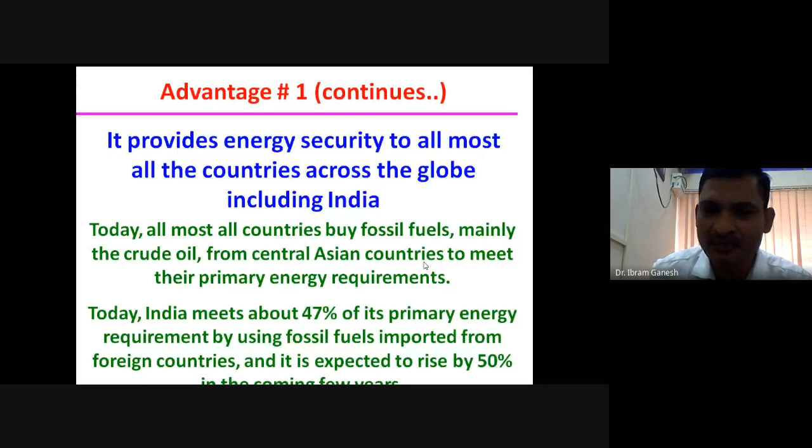So advantage number one continues. It can also change the global energy economy and energy dynamics of the world. That means once ARCI technology started deploying for public utility, no country is required to import fossil fuels, mainly the crude oil from Central Asian countries.

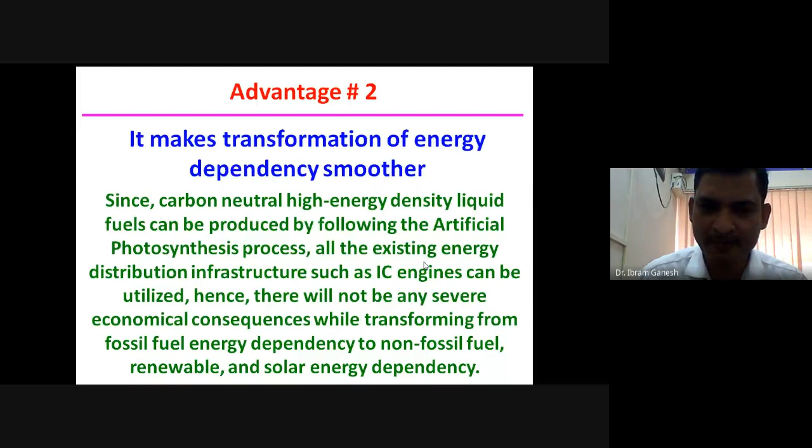The advantage number two is it makes transformation of energy dependency smoother. That means since carbon neutral high energy density liquid fuels can be produced by following the artificial photosynthesis process developed at ARCI, all the existing energy distribution infrastructure such as internal combustion engines can be utilized. Hence, there will not be any severe economical consequences while transforming from fossil fuel energy dependency to non-fossil fuel, renewable and solar energy dependency.

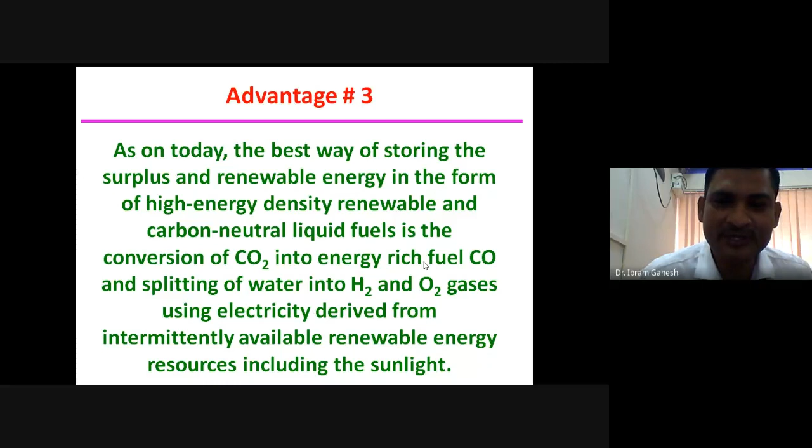As on today, the best way of storing the surplus renewable energy in the form of high energy density renewable and carbon neutral liquid fuels is the conversion of carbon dioxide into energy rich fuels such as CO and splitting of water into hydrogen and oxygen gases using electricity derived from intermittently available renewable energy sources, including the sunlight.

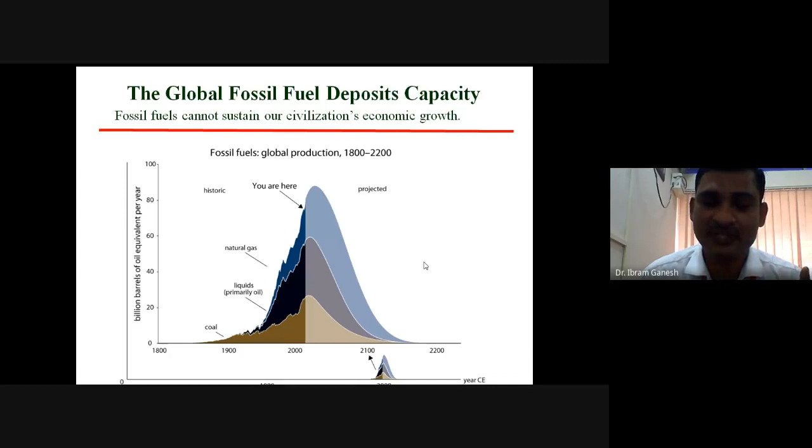This is Hubbert's curve. It shows the global fossil fuel deposits capacity. Hubbert says that fossil fuels cannot sustain our civilization's economic growth. As can be seen from this Hubbert's curve, in the next 100 to 150 years from now, all the extractable fossil fuels, mainly the crude oil and coal, will be exhausted. That means we have to find the alternative energy resource which can provide energy for the society.

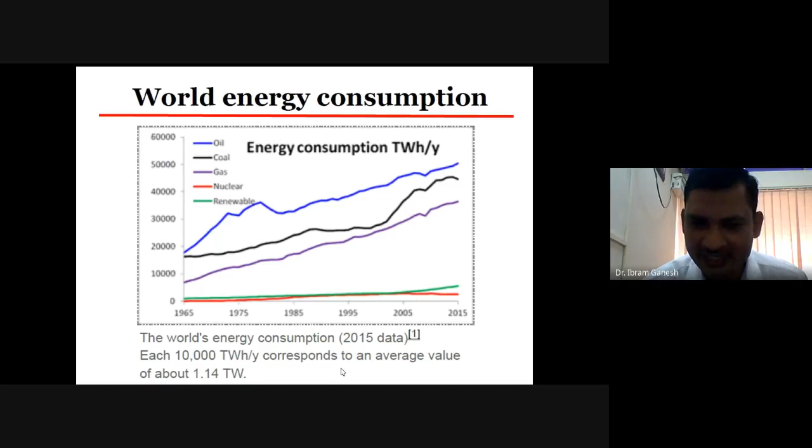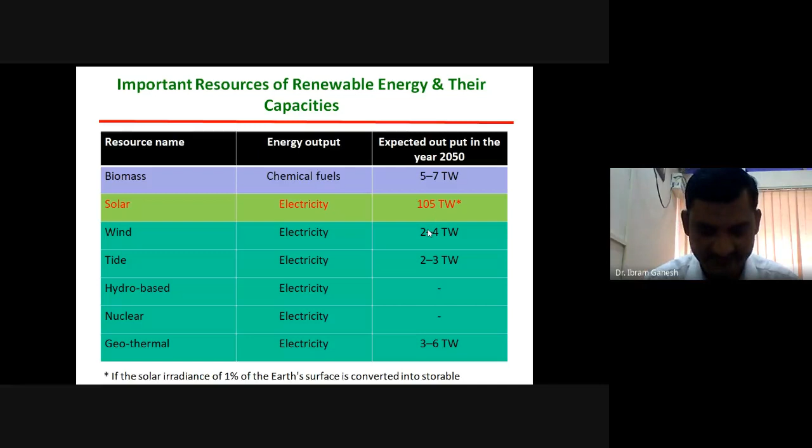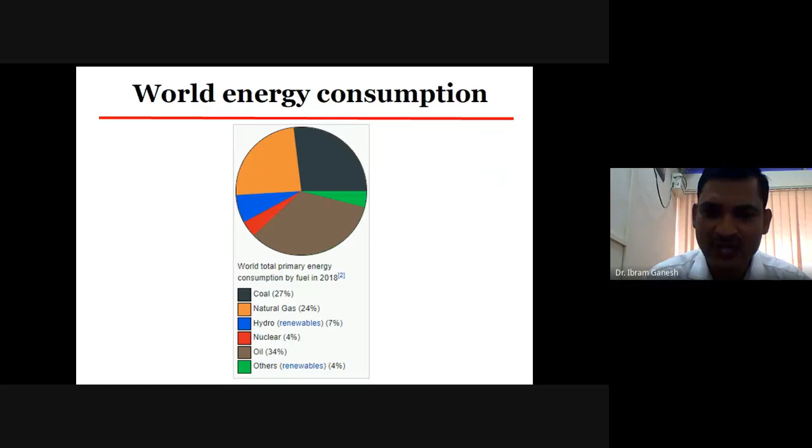Okay, this slide shows it in terms of percentage. Coal is 27% used today, natural gas is 24%, and oil is 34%. All together correspond to around 85%. Till today, the whole world meets about 85% of its primary energy requirement from only these fossil fuels, and renewable energies are very meager. In hydroelectricity we get around 7%, but it comes only when the dams flow the excess water. Otherwise, the other renewables, including solar and wind, are less than 4% only.

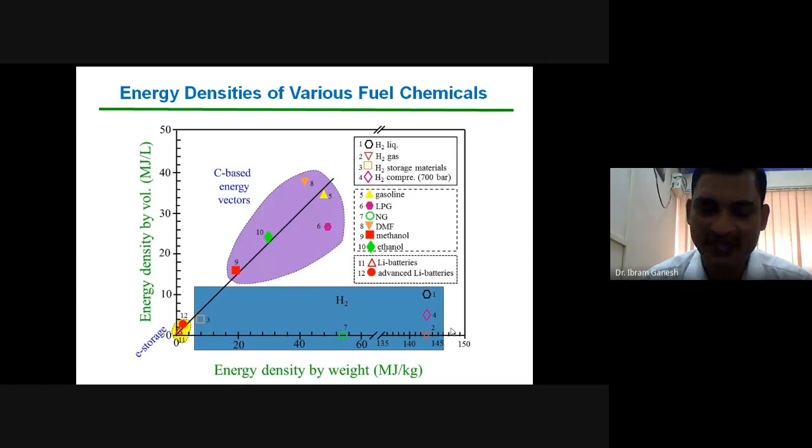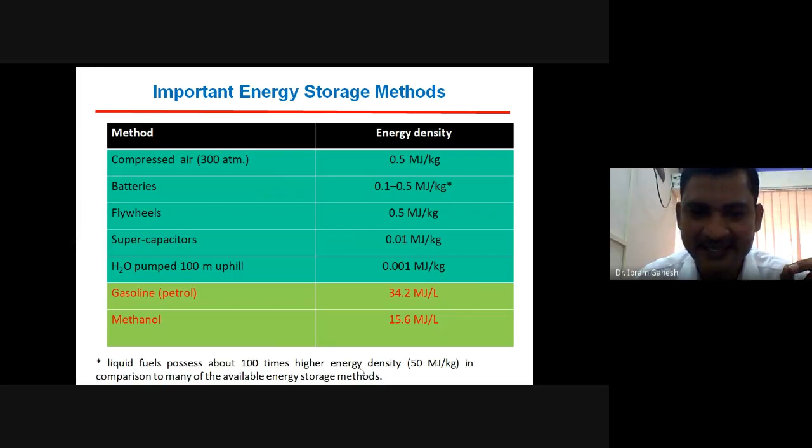For supercapacitors, it is 0.01 megajoules per kg. And for water pumped 100 meters uphill, it is 0.001 megajoules per kg. When compared with fossil fuels, like gasoline, it is 34.2 megajoules per 1 liter. And methanol, it is almost 15.6. That means liquid fuels possess about 100 times higher energy density compared to all the existing energy storage methods.

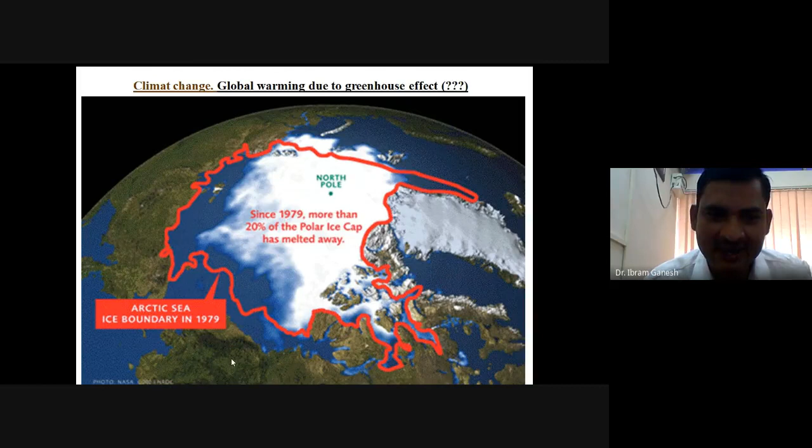So this figure shows the effect of global warming on the Earth. Since 1979, more than 20% of the polar ice cap has melted away. At the North Pole, it is the Arctic Sea ice boundary. This red line shows the Arctic Sea ice boundary in 1979.

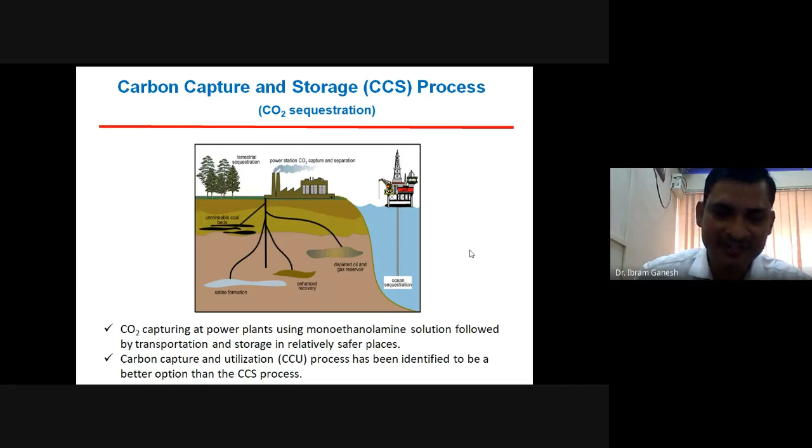Okay. The cost of the CO2 sequestration process. Recently, in 2016, one technology was developed at the University of Southampton, England. According to this technology, each ton of CO2 disposal costs around 1,000 rupees. It was printed in one of the local daily papers in Hyderabad.

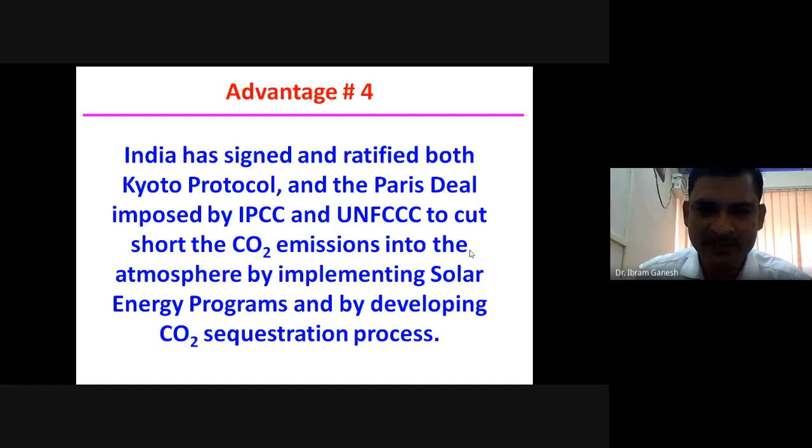Okay. Advantage 4. India has signed and ratified both the Kyoto Protocol and the Paris Deal imposed by the Intergovernmental Panel on Climate Change and United Nations Framework Convention on Climate Change to cut short the CO2 emissions into the atmosphere by implementing solar energy programs and by developing the CO2 sequestration process. Recently, the Department of Science and Technology also called for application proposals to develop the sequestration process to address the CO2 associated global warming problem.

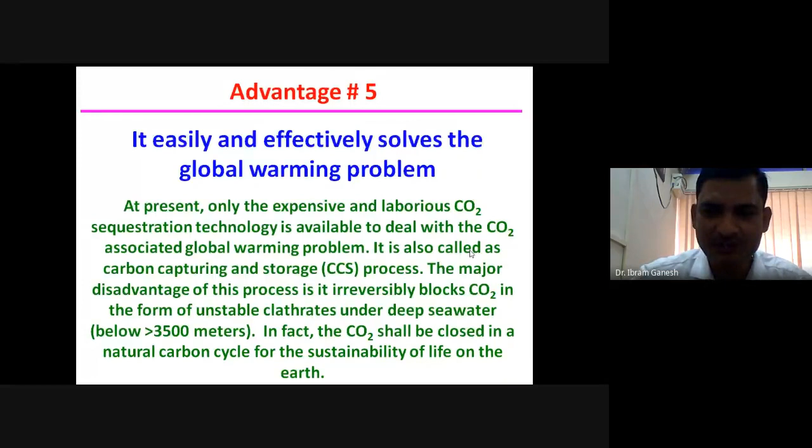Our ARCI technology, once it is implemented, easily and effectively solves the global warming problem. At present, only the expensive and laborious CO2 sequestration technology is available to deal with the CO2 associated global warming problem. It is also called the carbon capture and storage process. The major disadvantage of this CO2 sequestration process is it irreversibly blocks carbon dioxide in the form of unstable clathrates under deep seawater below 3,500 meters. In fact, the CO2 should be closed in a natural carbon cycle for the sustainability of life on Earth.

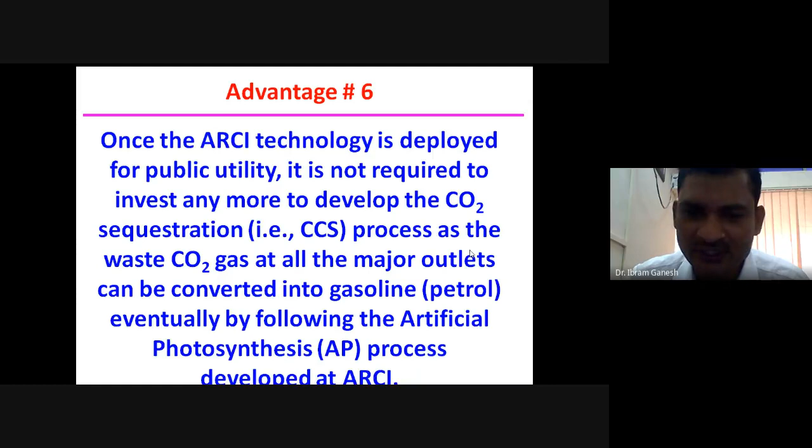As you know, each ton of carbon produces about 4 tons of carbon dioxide, and most of the carbon dioxide generated, not only in India but across the globe, is today released into the atmosphere. That is the reason it is causing global warming.

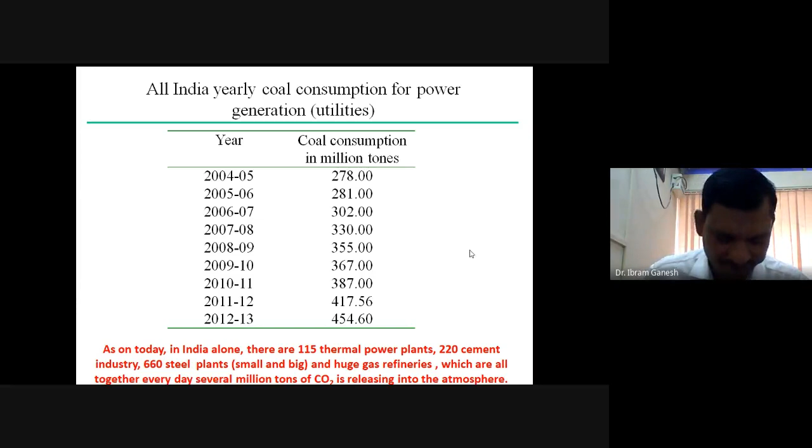Once the ARCI developed technology is fully deployed and operated for 5 to 10 years, it can create several millions of new jobs across the globe, and it can completely eliminate poverty from society across the globe.

After its successful deployment all over the world, at every home, like mobile phones are used by every individual today, in about a decade from then, almost all the excess CO2 present in the atmosphere can be removed and stored in the form of natural gas across the globe at all the seashores.

It requires less land area to get a unit amount of electricity from sunlight in comparison to all the existing commercially available sunlight to electricity producing technologies. It is simpler, more economical, easier and more efficient than any of the existing technologies today for converting sunlight into electricity. It involves only environmentally benign materials and processes. It is very close to the natural photosynthesis process.

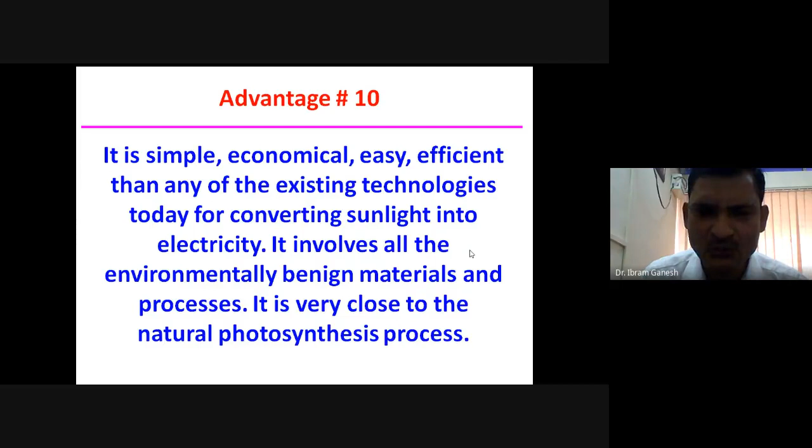Then what is the technology that solves all these energy and environment related problems without creating any other new additional problems? The only practicable artificial photosynthesis process. What is artificial photosynthesis? Similar to natural photosynthesis, artificial photosynthesis is nothing but the storage of solar energy in a form easily utilizable by human beings, using carbon dioxide and water as energy storing materials.

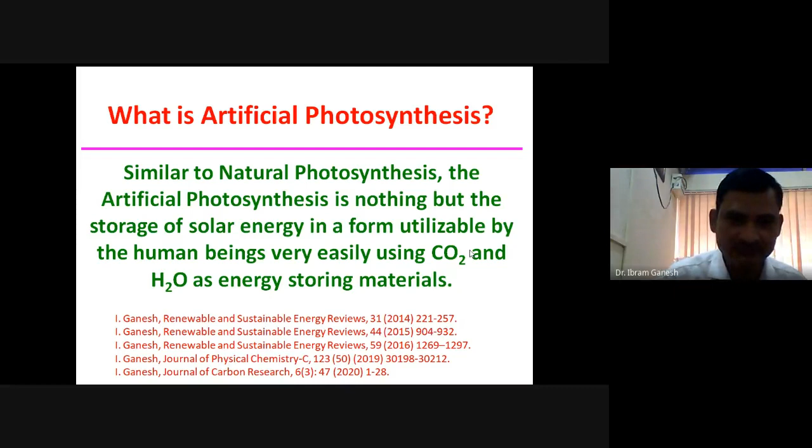What is the practicable artificial photosynthesis? As of today, there is no technology developed by human beings that works like a plant leaf, where the conversion of sunlight into electrical energy, the reduction of carbon dioxide to energy-rich fuels like carbohydrates, and the splitting of water into protons, electrons and molecular oxygen can be done.

So, we have to do the artificial photosynthesis process in 3 different separate steps, and then convert it into a usable fuel. The first process is production of electricity from sunlight. For this process, ARCI has invented a completely brand new technology called SLAPE, Semiconductor and Liquid Assisted Photothermal Effect, at ARCI Hyderabad.

As far as the second step, electrochemical reduction of carbon dioxide to carbon monoxide, is concerned, the process is developed at laboratory scale, and a new method was invented for this process too. As far as electrochemical splitting of water into hydrogen and oxygen gases is concerned, the entire world prior to 1970 was using this process to get commercial hydrogen gas from water. Around 1970, the steam reforming of methane process was invented, and today about 96% of commercial hydrogen gas comes from steam reforming of methane.

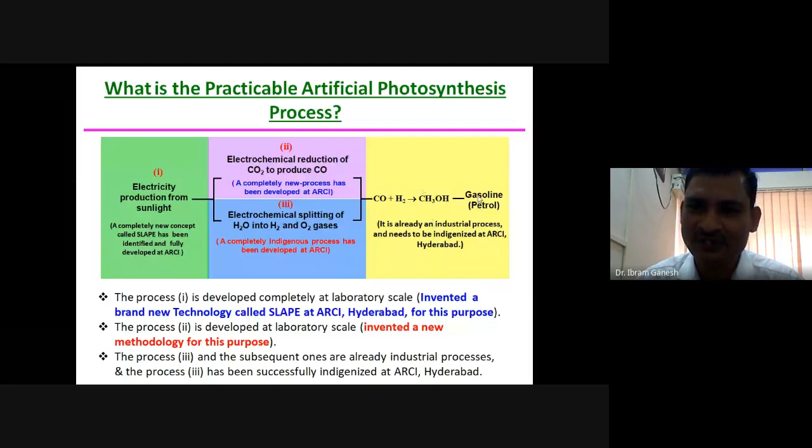Recently, a process for capturing CO2 from automobile vehicles was also developed: carbon dioxide capture from internal combustion engine exhaust using the temperature swing adsorption method. The captured CO2 can store renewable energy by being converted into green fuels using co-electrolysis. About 90% of the carbon present in the fuel can be recycled using the CO2 capture system, and the remaining 10% can be supplied from biomass.

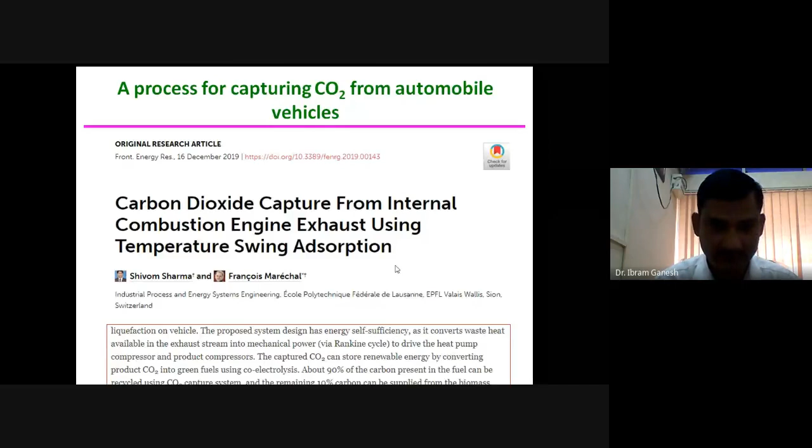As can be seen from the slides, nature also uses 2 separate electrochemical routes to convert carbon dioxide, water, and sunlight into carbohydrates. They are called photosystem 1 and photosystem 2. In photosystem 2, water is split into molecular oxygen, protons and electrons. These protons and electrons are utilized in the CO2 conversion into food material, carbohydrates, in photosystem 1. In fact, the energy consuming, thermodynamically unfeasible process is water splitting, not the CO2 reduction to carbohydrates.

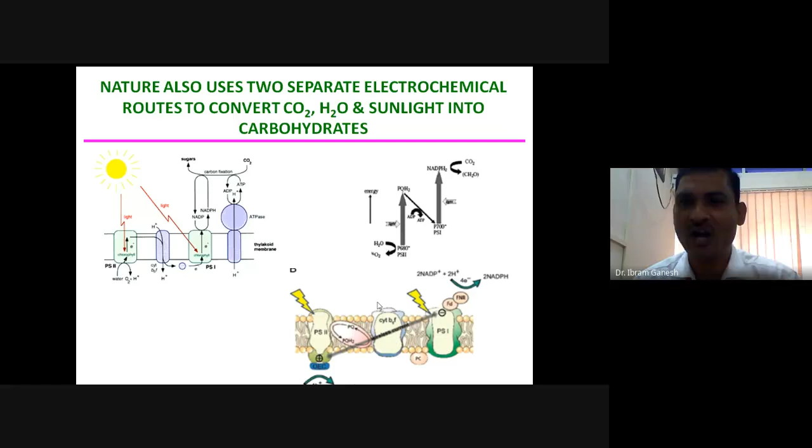CO2 reduction to any useful product is meaningful only when the energy required to drive this thermodynamically energy consuming process comes from renewable energy resources only, like electricity derived from sunlight. So the first step of the practicable artificial photosynthesis is electricity production from sunlight.

Today, there are 4 methods available to convert sunlight into electricity. The first one is silicon photovoltaic solar cell panels. The second one is dye-sensitized solar cells, also called Grätzel cells. The third one is concentrated solar power energy. The fourth one is thermoelectric generation, that is Seebeck and Peltier models.

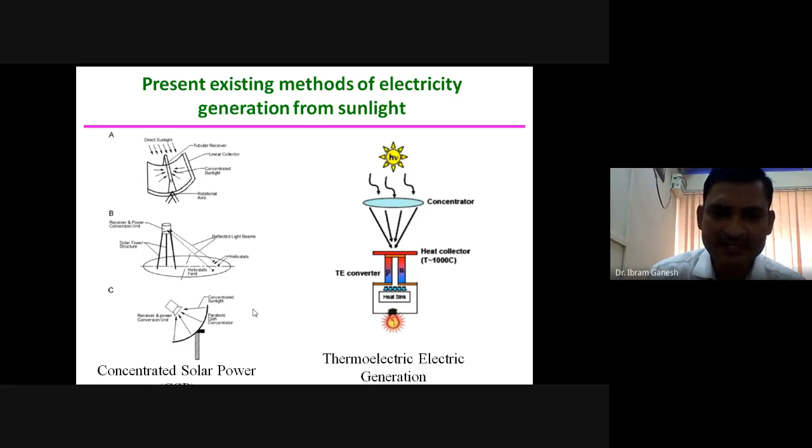So, how much electricity is produced today worldwide using solar photovoltaic cells, that is solar panels? In 2017, among the electricity used by the whole world, only 1.73% was produced from solar panels. That means 98% of electricity still comes from thermal power plants, or occasionally from hydropower. Hydropower we get only when dams overflow the water; otherwise, society has to depend only on thermal power plants, which use fossil fuels to generate electricity.

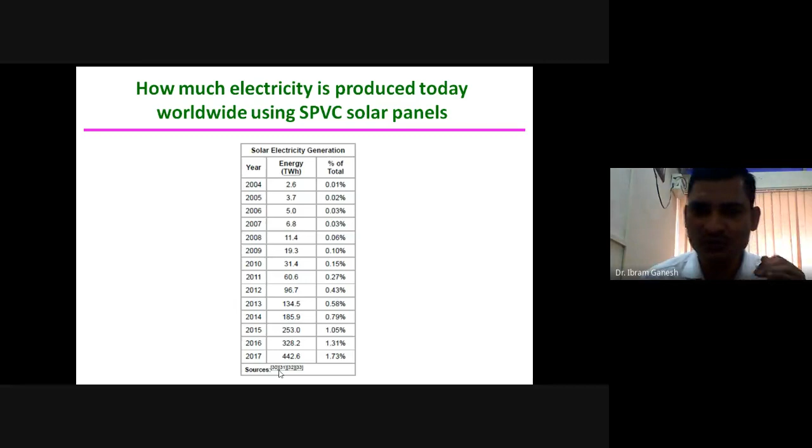So, among the top 10 solar power plants which generate the maximum electricity, 5 are present in India only: the Pavagada solar power plant, Badla solar plant, and Kurnool ultra mega power plant. These are India's, and not only in India, in the entire world they are the maximum electricity producing power plants from solar energy.

Silicon solar power cell panels were introduced almost 30 years into the market. In the recent past, its manufacturing cost has come down to the lowest possible extent, behind which it cannot be reduced further. But despite that, only less than 2% of electricity is produced from sunlight. Why is that?

The reason is because of these limitations, solar panels are used only less in society. I will tell you the limitations. The maximum achievable solar electricity conversion efficiency is only less than 20%. Hence, they need relatively larger land areas to get the desired voltage power capacities.

The light absorption is limited to only 70% of the sunlight reaching the Earth's surface, as its band gap energy is 1.1 electron volts with a corresponding wavelength of about 1125 nanometers. That means silicon in solar photovoltaic cell panels does not absorb sunlight in the range of 1125 nanometers to 2400 nanometers, which accounts for about 30% of the sunlight reaching the Earth's surface.

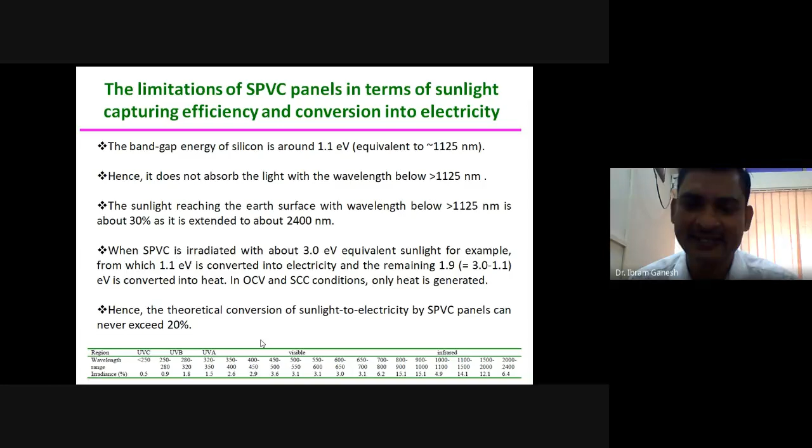When SPVC is irradiated with, for example, 3 electron volt sunlight, only 1.1 electron volts equivalent of light is converted into electricity, and the remaining 1.9 electron volts is converted into heat. Also, under open circuit voltage and short circuit current conditions, only heat is generated and no electricity is generated. Hence, the theoretical conversion of sunlight to electricity by silicon photovoltaic cell panels can never exceed 20%.

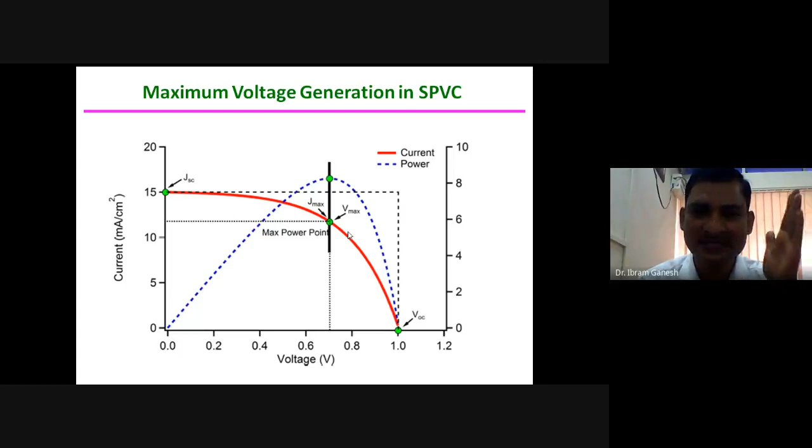This diagram shows the maximum voltage generation in solar photovoltaic cells. Here only up to 0.7 volts can be generated because its band gap is 1.1 electron volts. A material with 1.1 electron volts band gap can generate maximum 0.7 volts electricity.

Solar panels also cause the photovoltaic heat island effect. Larger solar power plants increase local temperatures. Solar panels are fabricated so that the in-situ generated heat energy by the silicon solar cells is dissipated as early as possible to achieve maximum sunlight to electricity conversion efficiency. For this, they select thin 3.2 mm solar glass and very thin, about 10 times 10 to the power minus 4 thick, ethylene vinyl acetate polymers, compacted into the solar panel. This EVA and the 3.2 mm thick glass ensure that the maximum amount of heat generated dissipates into the atmosphere as early as possible.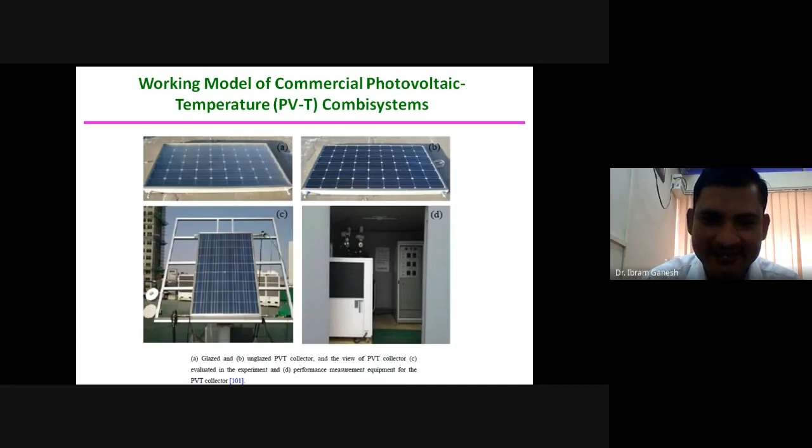This photograph indicates some commercially deployed systems. In this, A contains glazed and B contains unglazed PVT collectors.

In these silicon photovoltaic solar cells, the silicon cells have to be vacuum compacted between two layers of EVA encapsulant. If any moisture or air is present surrounding the solar panels during exposure to sunlight, the silicon undergoes conversion into silicon dioxide and loses its sunlight to electricity generating capability. That is why we must ensure that during exposure to sunlight, the silicon solar cell panels do not come into contact with either moisture or carbon or oxygen, because they should not undergo oxidation.

When electrons are excited from the valence band to the conduction band, the generated holes in the valence band and the electrons present in the conduction band have the ability to pull electrons from water. That is why they can easily oxidize the water, and they themselves undergo oxidation into a highly inert silicon dioxide material from silicon.

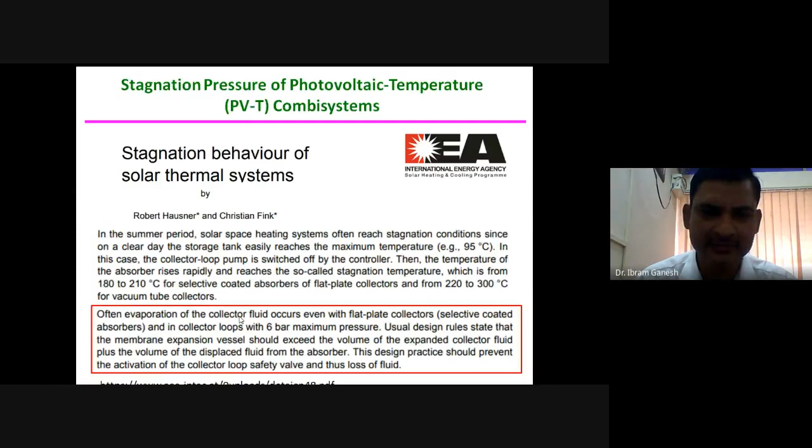Apart from the temperature, during stagnant conditions, the pressure also rises very often. Evaporation of the collector fluid occurs even with flat plate collectors, selective coated absorbers, and in collector loops with 6 bar maximum pressure. During stagnant conditions, this photovoltaic temperature condition generates pressure up to 6 bar. Because of this 6 bar pressure, sometimes it leaks the system and causes accidents.

Mrs. Toshiba Environmental Solution Japan says that recycling of silicon photovoltaic cell panels does not provide any profit, as the expenditure incurred for recycling is more expensive than the cost of the resultant products obtained from the recycled solar panels. This slide shows the first failure of silicon solar panels deployed for large scale utilization for domestic purposes.

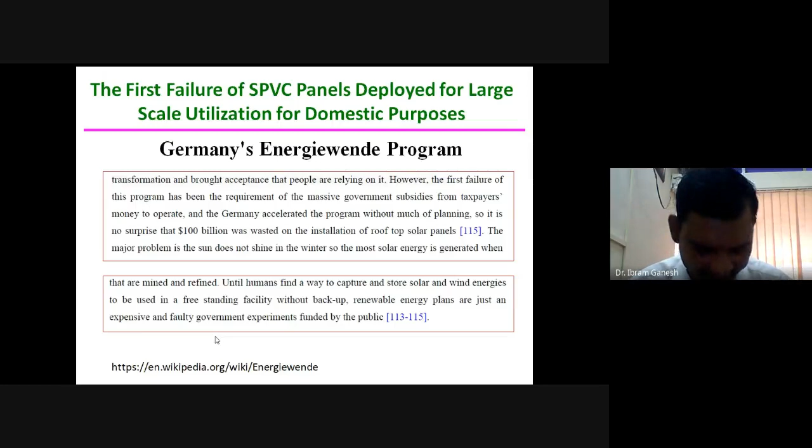In order to solve all the problems associated with silicon solar panels, a new method of electricity production from sunlight called Semiconductor and Liquid Assisted Photothermal Effect was invented at ARCI Hyderabad. Recently, we have filed this process for patent in India: a device and method for converting sunlight into heat energy using semiconductor materials immersed in a stable organic solvent for electricity generation.

So this SLAPE technology utilizes semiconducting materials for generating heat energy from sunlight. The main criteria to be possessed by the semiconductor materials is that they should have not only the band gap energy, but the band edges are also very important. They should have low band gap energy and band edges amenable to the liquid used to trap the sunlight.

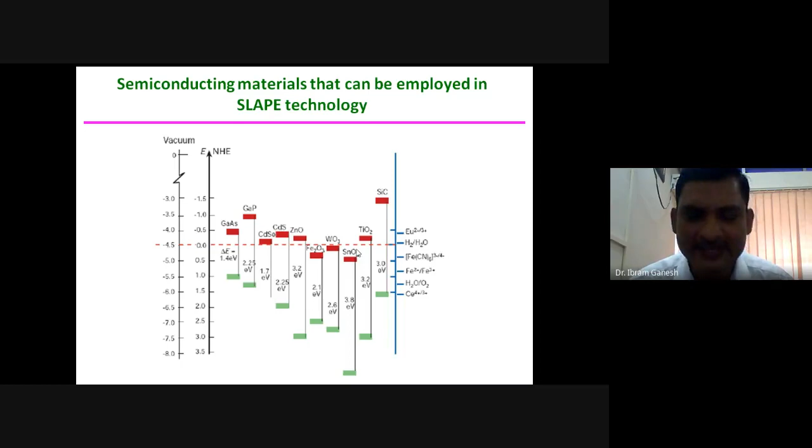Among the solvents listed in the bracketed red-line box, none have a reduction potential lesser than minus 2.5 in comparison to the standard hydrogen electrode, and their minimum oxidation potential is 3.2. Compared with the semiconductor materials, except for tin oxide, none have an oxidation-reduction potential more than 3.5 volts when compared to normal hydrogen electrodes. That means, except for tin oxide, all other semiconductor materials listed here can be utilized to generate electricity from sunlight in combination with these stable organic solvents.

So when the semiconducting materials are fully immersed in these organic solvents and exposed to sunlight, none of those semiconducting materials can either oxidize or reduce the solvents, because the solvents' band edges are very far apart in comparison to the oxidation-reduction potentials of those semiconducting materials.

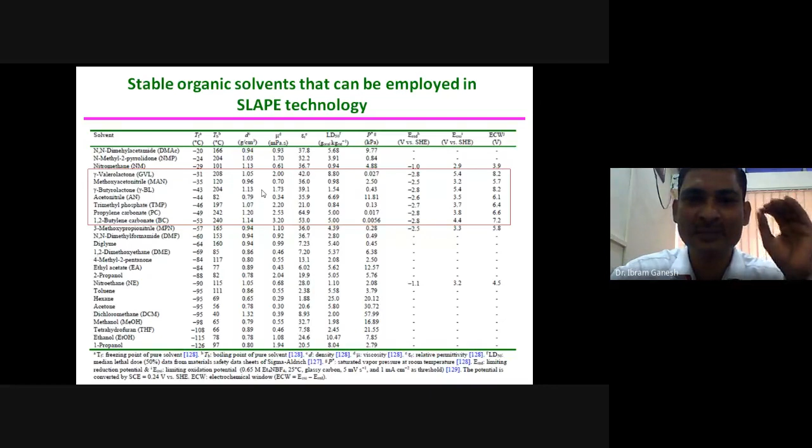So what is the mechanism used in the Semiconductor and Liquid Assisted Photothermal technology developed at ARCI? The first step is we use a semiconducting material completely immersed in a stable organic solvent. When that system is exposed to sunlight, it absorbs the sunlight and converts it into heat energy. This sunlight-to-heat energy generating device's duty is to capture the sunlight and translate the absorbed light completely into heat energy.

Once the heat energy is generated, we utilize it to rotate a system like a reciprocally moved steam engine, which converts the heat energy into rotational mechanical energy. Once the rotational mechanical energy is generated from the heat source instead of directly from sunlight, an electric generator attached to this reciprocally moved steam engine converts rotational energy into electrical energy. This electric generator dynamo uses electromagnetic induction principles, that is, Faraday's and Lenz's laws of electromagnetic induction.

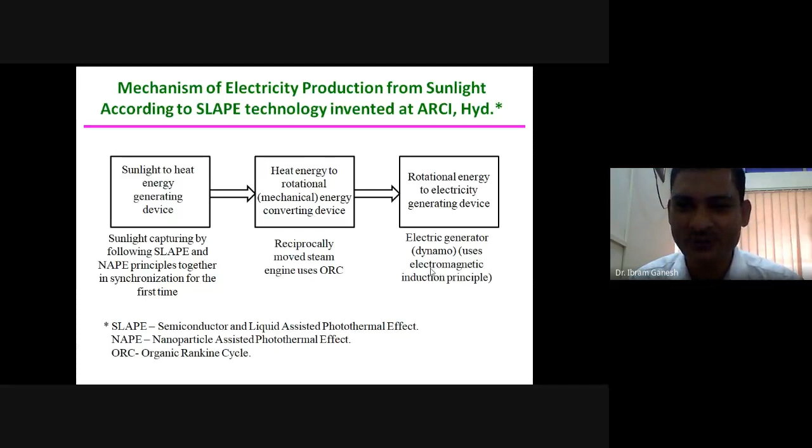So in comparison to silicon solar panels, the major advantages of our technology are it exhibits all the benefits that are exhibited by silicon photovoltaic cells. In comparison to silicon photovoltaic solar cells, it is economical and stable, as it need not employ expensive materials like crystalline silicon solar cells. Unlike silicon photovoltaic cells, it does not consider only 70% of sunlight, for it absorbs 100% of light reaching the Earth's surface and converts it into heat energy.

Unlike silicon photovoltaic cells, its voltage generation is not limited to only 0.7 volts. Unlike silicon photovoltaic cells, its conversion does not decrease with increasing ambient temperature, and it does not block 8 to 10% of light conversion to electricity by the grid lines printed on the silicon solar cells. And unlike PV, it need not be irradiated with straight light.

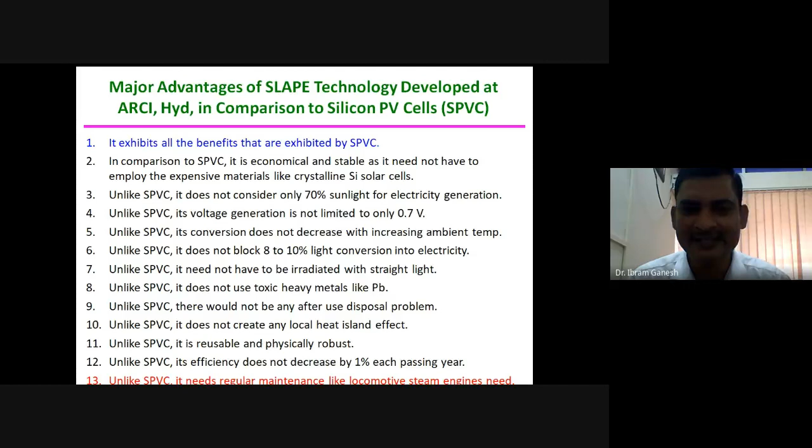It does not use toxic heavy metals like lead. There would not be any after-use disposal problem, it does not create any local heat island effect, it is reusable and physically robust, and its efficiency does not decrease by 1% each passing year. However, unlike SPV, the silicon photovoltaic cells, it needs regular maintenance like locomotive steam engines need.

solution-based systems. That is the reason we have used semiconductors to absorb up to 70% of the light falling on the surface. The remaining 30%, that is IR radiation, will be absorbed by the liquid used in our system. So both liquid and solid together absorb the complete light falling on them, and they convert that incident light into heat energy.

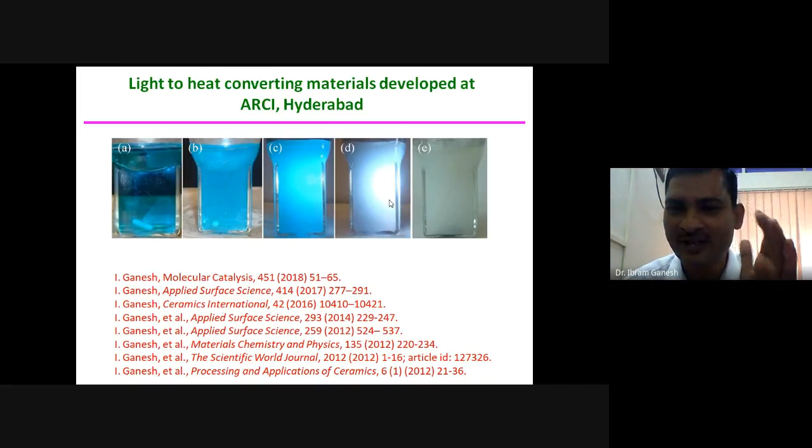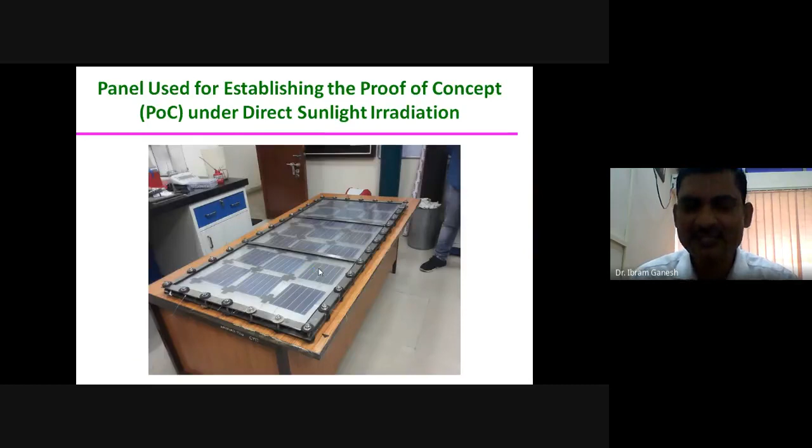So this is the solar panel we have fabricated at our ARCI. To prove the concept, we have used commercially available silicon solar cells. We have taken 21 silicon solar cells and connected them using copper strips. This panel is a 2-compartment device, as you can see here. We have used different materials to make the panel into 2 compartments. The top compartment contains the energy absorbing semiconductor materials, in this case the silicon cells, and these cells are dipped in gamma-butyrolactone solution.

When this device is exposed to sunlight, the light falling on the system is absorbed by the silicon cells together with the solution, and they generate heat as the exposure time progresses. The heat generated in the top chamber is transported into the bottom chamber through a thin copper sheet. The thermal conductivity of copper is the highest among the materials available in the market, next to diamond actually.

So the heat is transported from the top chamber to the bottom chamber, which contains dichloromethane, a low boiling solvent. It takes the heat from the top chamber through the thin copper sheet, gets heated up and boils. When it boils, it generates pressure of up to 5 bar. Around 3 bar pressure is good enough to generate electricity with up to 17 volts.

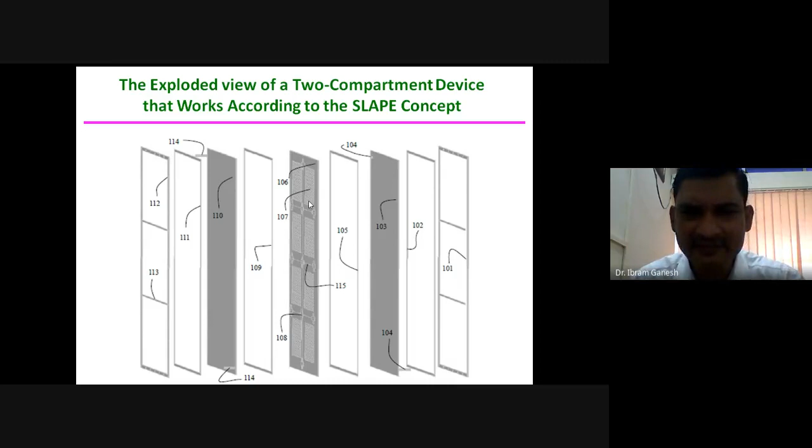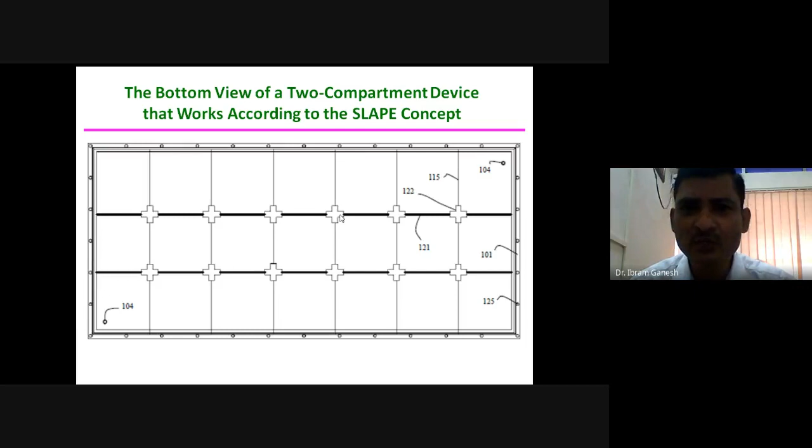These plus symbol ones are the rubber materials we have used to maintain the gap between the top glass and the copper sheet. So we can ensure that the volume of the top chamber is between 2 to 10 liters and the bottom chamber is only 2 liters. This is the bottom view of a two compartment device that works according to the SLAPE concept.

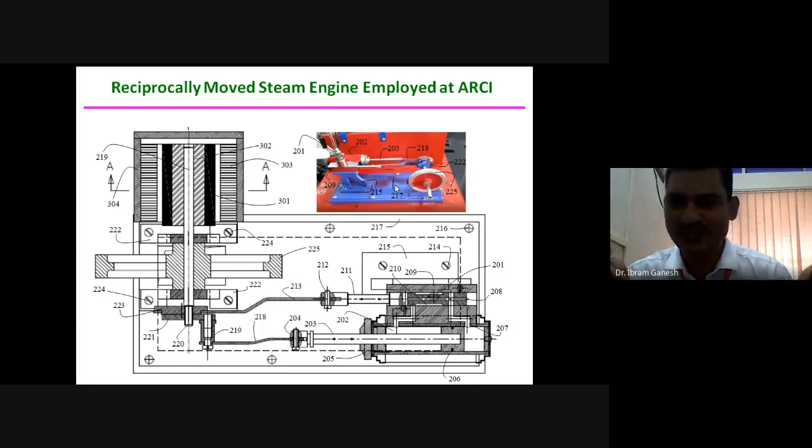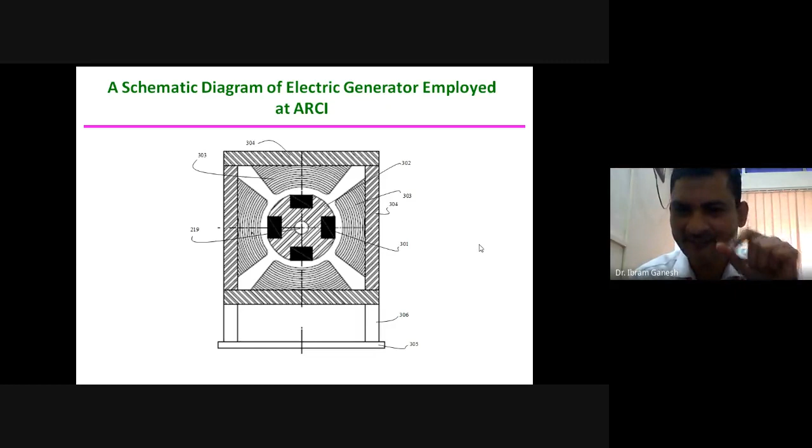This is the reciprocally moved steam engine we have employed to generate the electricity from the heat in situ generated by the silicon solar cells dipped in the gamma butyrolactone when they are exposed to the sunlight. It is the schematic diagram of an electric generator we have employed at ARCI to generate electricity from the pressure generated by the solar light. Okay.

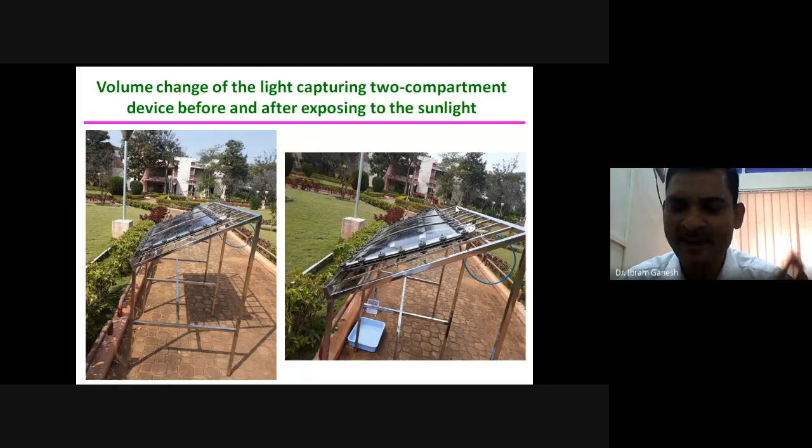And the working fluid, the dichloromethane, is only 2 liters. We can use water or dichloromethane. Since the boiling point of water is 100 degrees centigrade, we cannot generate heavy pressure to generate the electricity as soon as possible. If you use water, you have to wait a long time. If you use dichloromethane, within half an hour we start producing the electricity.

When this insulation was used and 0.2 mm thick copper sheet was used and the gamma butyrolactone solution was 10 liters, and silicon solar cells and this gamma butyrolactone were employed in the system for collecting sunlight from the sun, we generated 17 volts and 2 amps current. I will show the videos indicating this electricity generation.

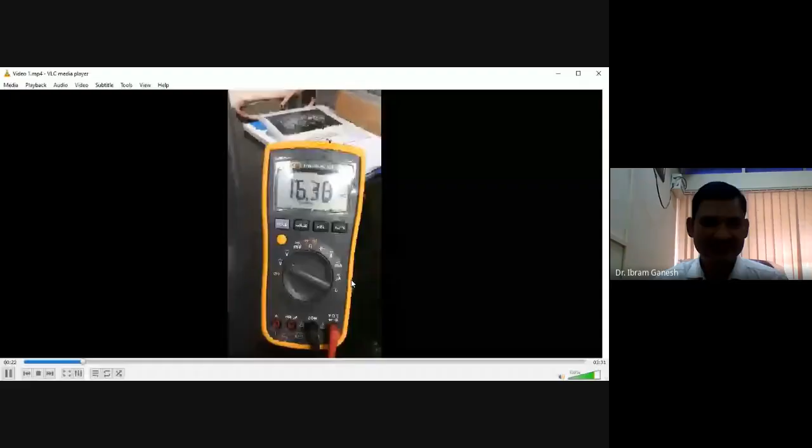Sir, are you seeing this one? Videos? No, sir, the video is not visible. Are you able to see, madam? No, sir. Okay. Then what do I have to do to show the video to the audience? Hello? Sir, you just have to share your screen, and your PC screen should show here, and then you can play the video. The video is running on my computer screen. So first you want to stop sharing and then reshare, sir. Stop sharing. Okay. Yes, sir. Now you are able to see, madam? Yes, sir, we can see.

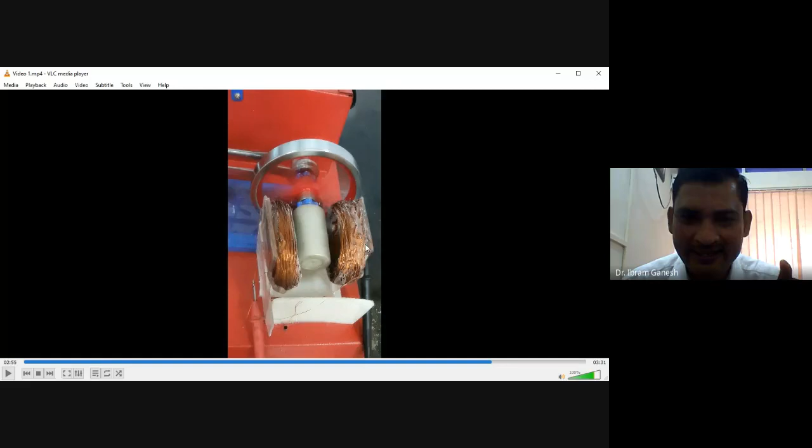So this is, you can see, 16.6 AC voltage we are generating. Yeah. This is the electric generator I have fabricated. It contains 4 neodymium based super strong magnets and 2 copper coils, with 1500 turns. So this device is able to generate 16 volts; we can see 17 volts AC voltage is generated.

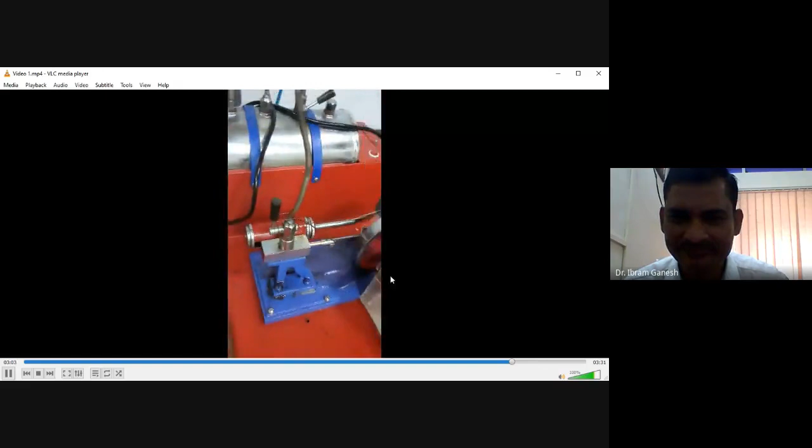You can see here 3.5. We have used argon gas to see the effect of pressure on the voltage generation. As you can see here, when 3 bar pressure is pumped into the reciprocally moved steam engine, it generates around 17 volts electricity with 2 amperes current. I will show you another video.

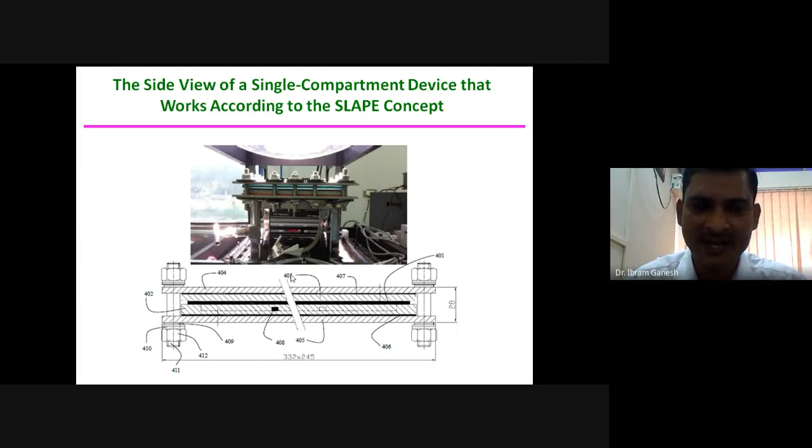Actually, this device should be adiabatically sealed. It should only allow the light to pass from the top to the inside, but no heat generated inside the top chamber should come out of the device to the atmosphere. We have to ensure that there is no heat loss from the device. Only then can we get the maximum conversion efficiency from sunlight to heat energy, then to electrical energy. It shows the side view of a single compartment device that works according to the SLAPE concept we developed at ARCI.

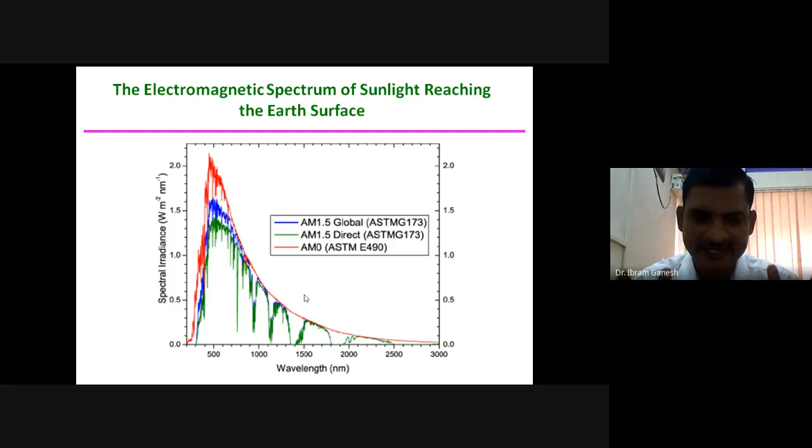Everybody knows this; it's the solar spectrum of the sunlight reaching the Earth's surface. The maximum intensity is between visible light and UV only. But in the long wavelength range, you'll see the IR radiation intensity is very less. But from 1100 to 2400, the light reaching the Earth's surface in the IR region accounts for 30% of the light.

So this shows the light capturing ability of doped TiO2 powders. When you see 10% doping of cobalt, iron, nickel and copper, when we employ each powder with 25 grams, altogether 100 grams, we disperse in gamma-butyrolactone, 140 ml gamma-butyrolactone, and place in the A4 size one. When you expose the light, all four powders together completely absorb the light falling on them.

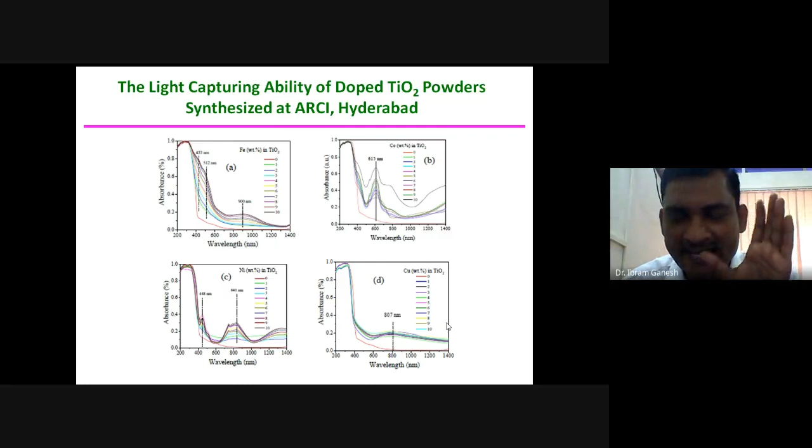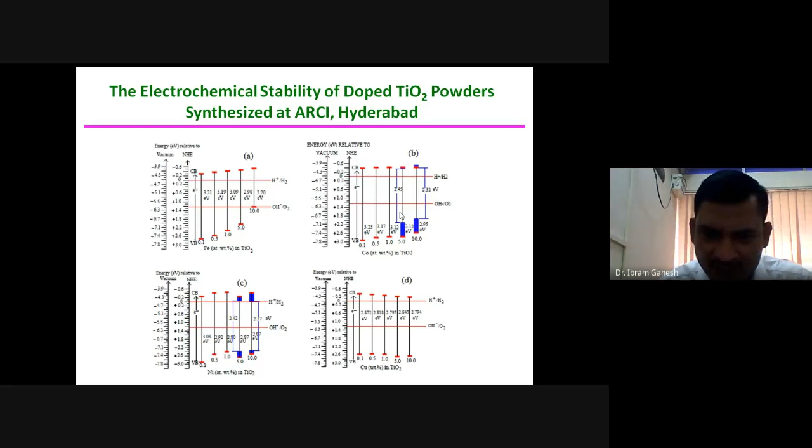So this diagram shows the electrochemical stability of doped TiO2 powders. These band edges, what is that? These are oxidation potentials and reduction potentials. If you see all these things, these doped TiO2 powders are quite stable when they are completely immersed in the water and exposed to sunlight.

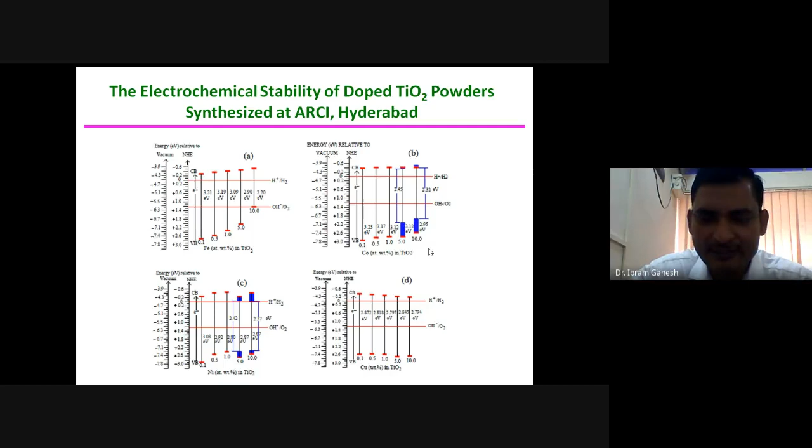Apart from this stoichiometric conversion method, all the remaining five methods, thermochemical, photocatalytic, photoelectrochemical, electrochemical, store energy, because any CO2 conversion to value-added products needs external energy. It has zero energy, and when you want to convert carbon dioxide to any energy-rich product, we have to supply external energy apart from the energy to overcome the activation barrier.

That is the reason nature chose carbon dioxide and water as energy storing materials to prepare food, not only for the 7.7 billion people living on Earth. The entire life present on the Earth gets the solar energy stored by the plant leaves in the natural photosynthesis process using carbon dioxide and water as the energy storing materials. Cultivation in the fields is nothing but storing solar energy to feed human beings and other animals.

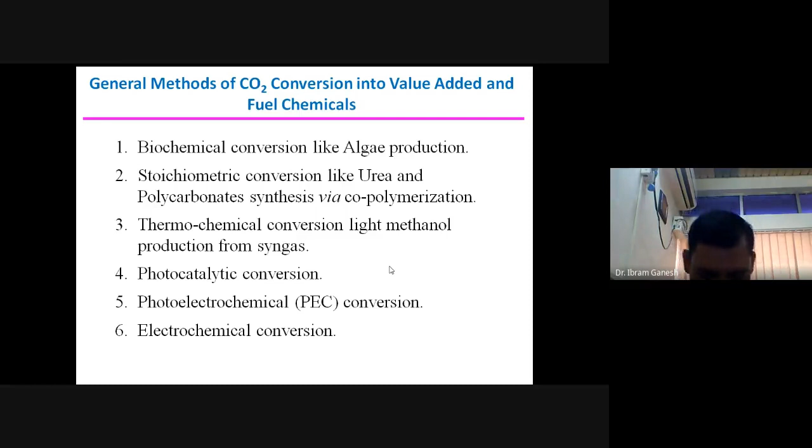In the photoelectrochemical reaction, we give sunlight or electricity to convert carbon dioxide to a valuable product. In the electrochemical reaction, we supply electricity generated either from sunlight or from the grid by burning fossil fuels. That electrical energy you have to supply for the carbon dioxide conversion into any value-added energy-rich products. Okay.

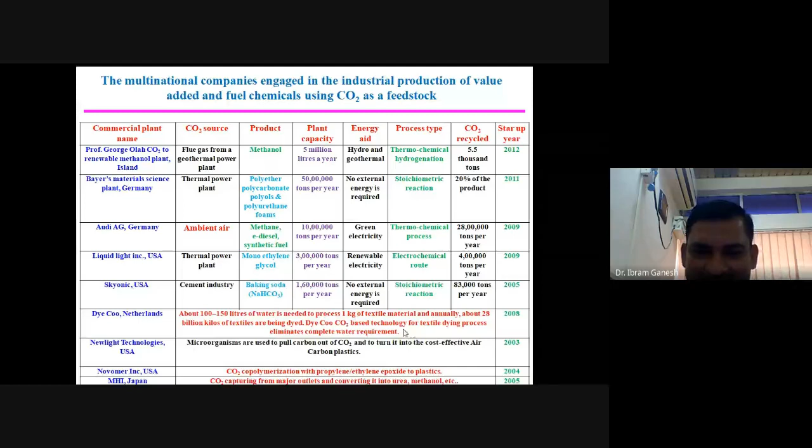So Mitsubishi Heavy Industries, Japan's commercial CO2 capture plants, have developed the process to capture the carbon dioxide generated by thermal power plants, and they are giving this technology to many companies across the globe to capture the carbon dioxide. Mainly the carbon dioxide is captured by following this Mitsubishi Heavy Industries Japan's technology.

Mostly, afterwards the carbon dioxide is converted into urea, but the carbon dioxide captured by these technologies is very meager. Not even 1% of the carbon dioxide generated all over the world is captured and converted into urea. The reason is urea utilization, urea production.

If you take the entire carbon dioxide generated across the world at all major outlets such as thermal power plants, steel industries, cement industries, and convert it into urea, there is no utility for that much urea in the society. So what you have to do is capture the carbon dioxide and convert it into energy-rich chemicals like petrol. If you convert all the CO2 captured into petrol, there will be no reduction. The demand will be very huge.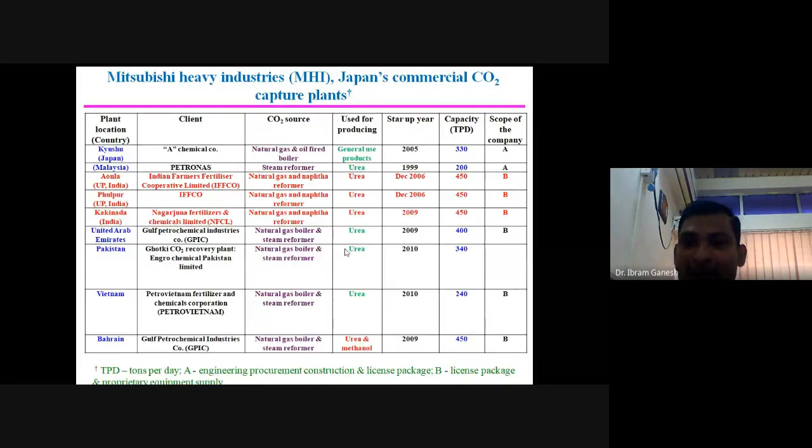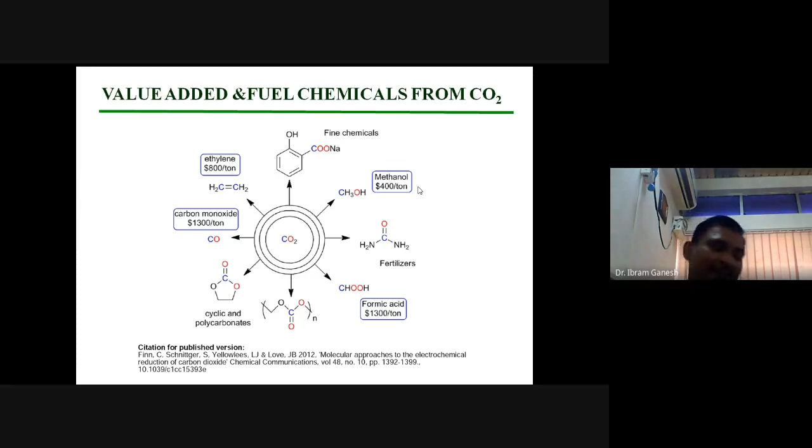See, the issue is that 1 ton of carbon monoxide costs $1,300. But carbon monoxide is the starting material for methanol synthesis. Today, methanol is produced all over the world only from syngas, the thermochemical route. They use the syngas to make the methanol. Carbon monoxide, 1 ton of gas, costs $1,300. The product formed out of the carbon monoxide costs $400.

The one thing you have to see is the energy density. If you make methanol, you can use it in internal combustion engines in place of diesel or petrol. But carbon monoxide you cannot use there directly. If you want to use carbon monoxide, you have to use fuel cells to get the electricity back. But if you use carbon monoxide to make electricity using fuel cells, since it is a gas, the volume is a big problem. So we have to have liquid fuels made out of carbon dioxide to be easily utilizable by the society.

So if you make formic acid instead of carbon monoxide, both are $1,300 per ton. Carbon monoxide formation in the electrochemical process is much easier than formic acid formation, because carbon monoxide is a gas. It easily escapes from the electrochemical cell. In comparison, if you make formic acid, you have to separate it. It is a very expensive process.

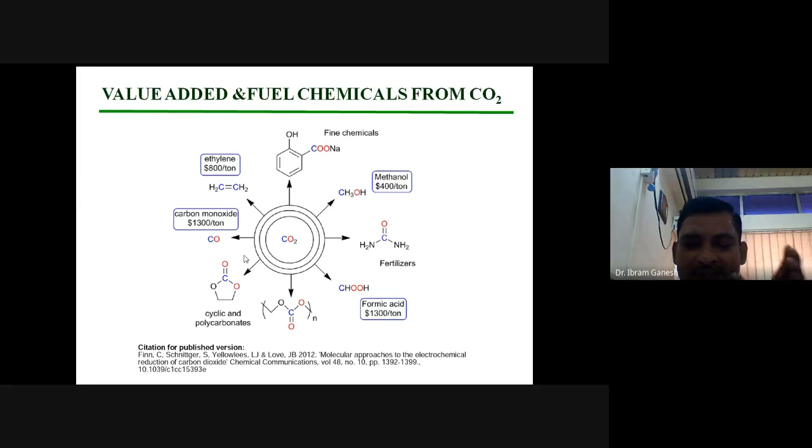And one more advantage is, if you make carbon monoxide, it and hydrogen gas together can be used to make methanol by following industry-available technology. Once the methanol is produced from the CO2, the CO coming from CO2 and the hydrogen gas from water, the methanol can eventually be converted into gasoline, that is petrol.

So we have developed a technology at ARCI to convert carbon dioxide into carbon monoxide. The carbon monoxide selectivity and Faraday efficiency was between 95 and 100%. The rate of CO formation, that is the current density, is more than 100 milliamps per centimeter square. To generate any gaseous product in any electrochemical process, its rate of formation must exceed 100 milliamps per centimeter square. And the process should have very low associated potentials to minimize the wastage of electricity.

Energy, actually, if you take water, its energy storage capability is 1.23 electron volts. When you convert water into hydrogen and oxygen gases, it stores 1.23 electron volts of energy.

Apart from 1.23 electron volts, water needs excess energy to form into hydrogen and oxygen gases. That excess energy goes as overpotential, which is a wastage. The energy used to convert the product from water to hydrogen and oxygen is stored. That means only 1.23 electron volts of energy can be stored by converting 1 mole of water into its corresponding hydrogen and oxygen gases. To convert 1 mole of water into hydrogen and oxygen gases, you should supply 1.23 volts.

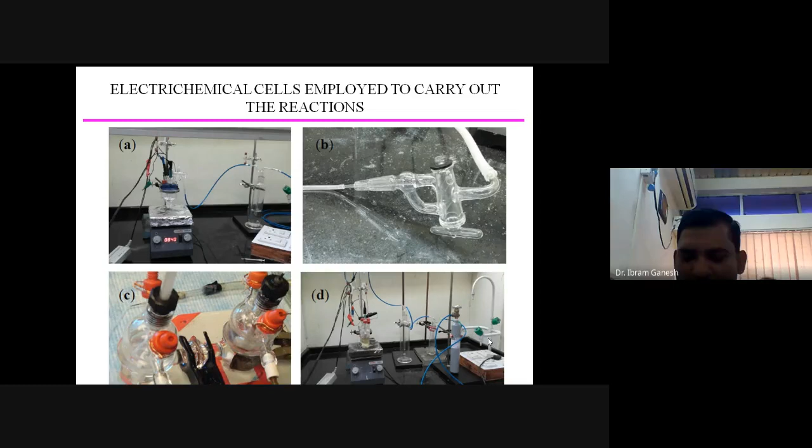When we dip the platinum anode in the solution and the bismuth alloy cathode in the organic solvent, separated by the Nafion membrane, and pass carbon dioxide to perform the reaction, there is an in situ formation of a black color on the surface of the platinum anode. That formation is due to the cobalt phosphate thin film catalyst.

This catalyst reduces the overpotential associated with the oxidation of water into molecular oxygen and protons. When water undergoes oxidation, it generates electrons, protons, and molecular oxygen. Electrons come from the external circuit and reach the cathode, protons pass through the Nafion membrane, and carbon dioxide, by taking these protons and electrons, gets reduced into carbon monoxide. People believe that in this process, water also forms as a byproduct.

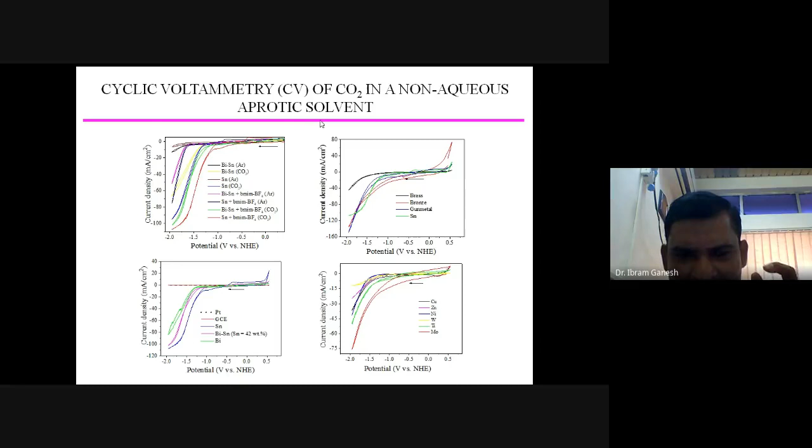In the absence of CO2 and ionic liquid, we could not see this reduction potential in the gray and black color lines. To prove this CO2 reduction from the red line was due to carbon dioxide to carbon monoxide, along with the cyclic voltammetry experiments, we have also performed control potential bulk electrolysis experiments. In this case, we have used...

carbon-12 isotopic carbon dioxide and carbon-13 isotopic CO2 gas to prove that CO is formed exclusively from CO2 gas, not from any other organic matter.

In another experiment, when we passed carbon dioxide continuously during the complete experiment, we did not see any reduction in the current density. We saw continuously increasing current density, due to the conversion of carbon dioxide to carbon monoxide.

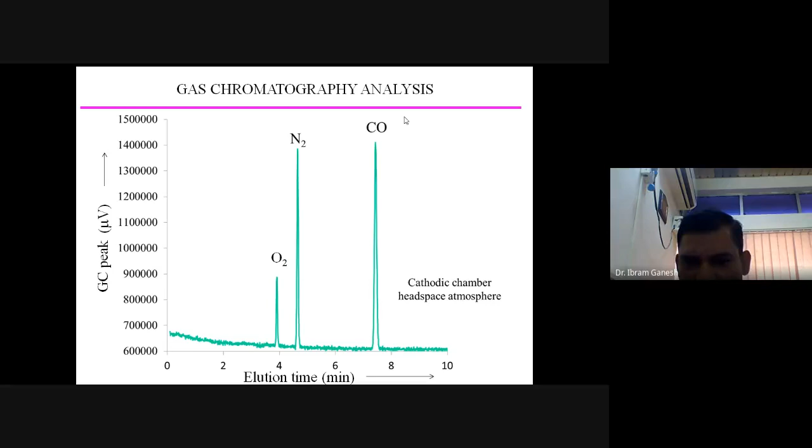This is the gas chromatography analysis of the cathode chamber headspace area. The cathode chamber headspace area contains the CO formation. The oxygen is from air, and CO is due to the reduction of carbon dioxide.

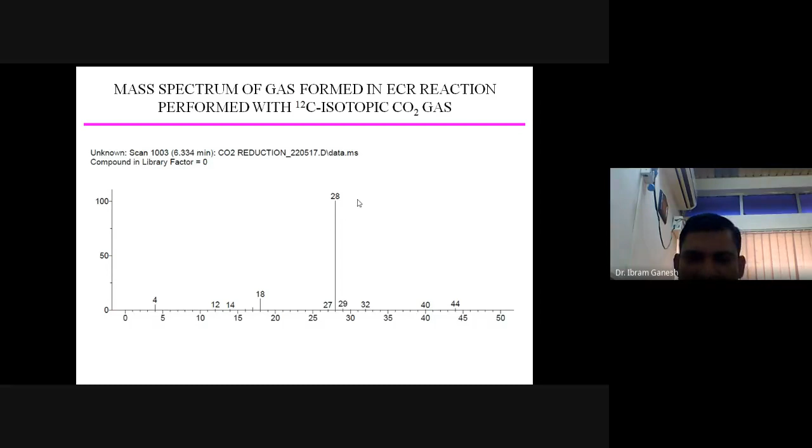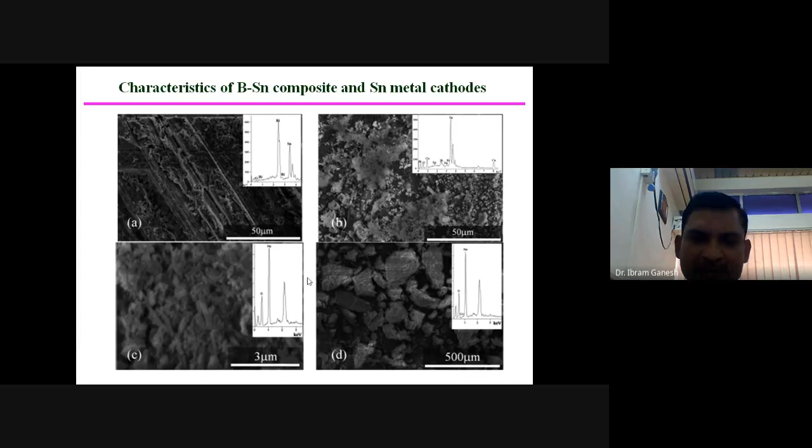During the formation of CO from CO2 in our system, we have also noted some formation of solid substance in the catholytic solution. When we analyzed this solid material, it was identified to be sodium bicarbonate. So that means along with CO, another side product, sodium bicarbonate, is also forming. This was also confirmed by FTIR studies.

Our characterization gave information that the CO2 reduction is not undergoing by involving protons and electrons. The CO2 reduction takes place without involving protons, as shown in equation 1, a net reaction of 2 moles. The cathodic half-cell reaction, in the absence of aqueous-based anolyte solution in the anode compartment, shows 2 moles of CO2 gas receiving 2 electrons and converting into carbon monoxide and carbonate ion. This carbonate ion passes through the membrane, reaches the anode surface, and undergoes oxidation to carbon dioxide and molecular oxygen. That is the net reaction.

So far, the scientific community believes that in the anodic compartment, water undergoes oxidation to produce protons, electrons, and molecular oxygen. The electrons reach the cathodic compartment and protons reach the Nafion membrane, where 2 protons and 2 electrons react with CO2 to form CO and one water molecule. But in our case, when water is used as the anodic solution in the anolyte compartment, water undergoes oxidation, but the produced protons do not involve themselves in the CO2 reduction process. That is what we observed in our experiments.

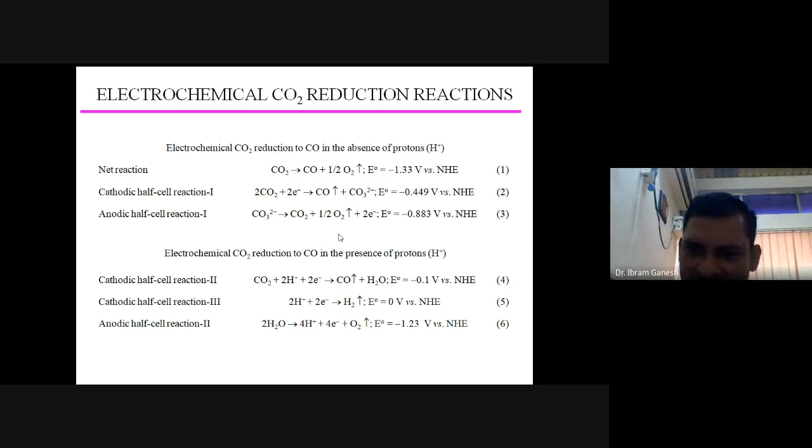The products are CO, hydrogen gas, and sodium bicarbonate. We have seen formation of up to a maximum of 5% hydrogen gas. That hydrogen gas formed also suggests...

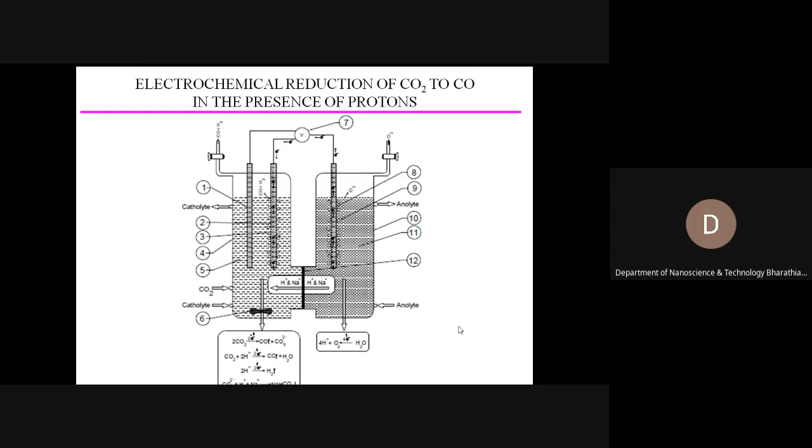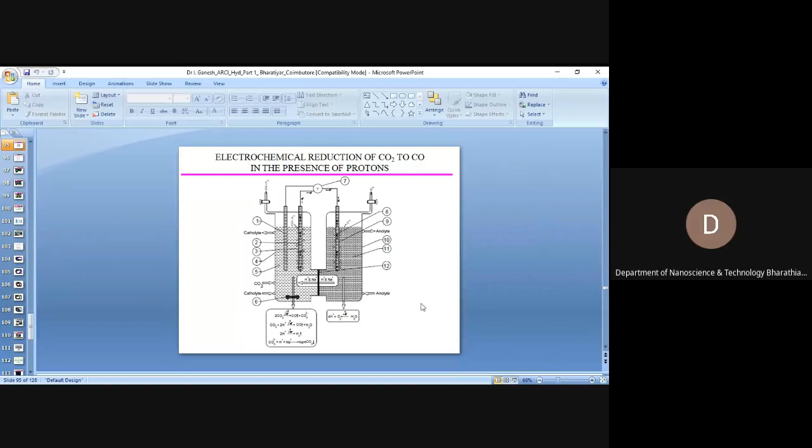Excuse me sir. Sorry to interrupt, sir. Yes, I am hearing you, can you hear me? Yes, I am hearing you. Sir, the second session has to start at 12. Maybe you could cover only the important aspects of the coming slides so we can have the next session. How many minutes are there, sir? Okay, 10 minutes, madam, I'll cover it. Sorry to interrupt, but the second session has to start, that's why.